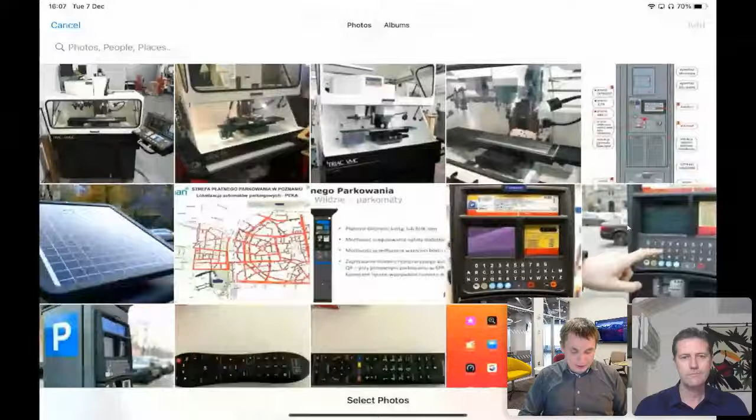Also, as you can imagine, 360 is still a valid element of virtual reality. So right now we have the ability to bring in models or assets directly from within the mobile device. Creating a full 360 lesson, selecting the objects, selecting the photos, bringing them in, uploading, and creating a lesson on the mobile device that will be some sort of demo lesson. I'm just going to use a demo category here.

So for the purpose of this webinar, giving the ability to easily launch and build everything from the level of your phone, having this available within the mobile device, adding those annotations already. Speaking about the annotations...

We all know that there is right now a new way to do the annotations. We still have the ability to move and position those annotations much more freely around the space, but we've also added far more abilities to the platform, to the lesson creation, to the 3D experience creation process. So except for the typical ones, like recording your audio, we have text-to-speech, upload directly from a mobile device, and we've also added video, PDF, and images, which allows me to easily select an image.

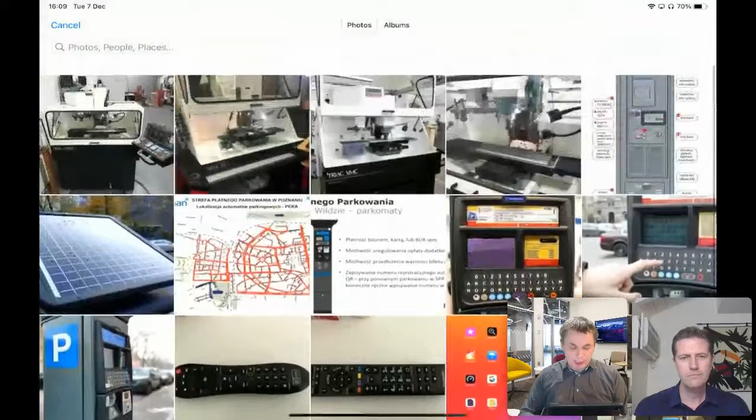If I have an image I'd like to apply here, let's say a remote control or a solar panel, I can easily add it and upload this. Of course it's best if it's in the context of the lesson, but here I'm just showcasing how easy it is to add different elements to the 360 experiences, as well as how you can build up quizzes, having that all in your 360 lesson, not forgetting about the full interactivity and immersiveness from the 360 elements.

To talk a bit more about the new options inside the platform, there is more coming, especially in the alignment of the model and bringing that in. But one thing to briefly mention: right now the icons, the models in the library where you're bringing content in, we can set them up into one-to-one scale. We can easily see if it's published or not published, if it's one-to-one scale, multiple mesh or singular mesh, which makes it much easier to choose the model you want from a library and experiment with it.

So choosing the model, here we have the ability to play this lesson, align it, and we'll play it in a moment. I don't want to put too much information, but I want to highlight that within this session, at the end, we will start not only a standard meeting, but also special meetings where we can collaborate and do things jointly together with John.

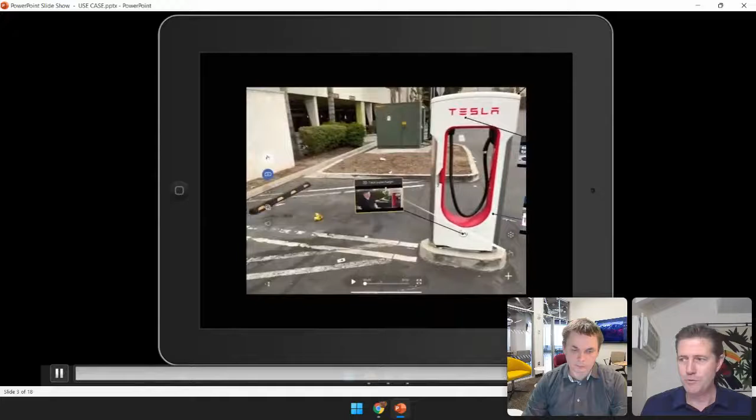And then I'll be able to play the videos. At one of our Tesla supercharger stations, charge your car very quickly and be on your way. Something that's unique about the supercharger is that it's free - not just free now, it's free forever. The number of Tesla supercharging stations is increasing dramatically.

By the end of this month... let me go back there. So I could spend some time just going through those videos.

Now I'm going to show you what we call a 3D avatar recording, where once the model is set 1-to-1, in the lower right-hand corner I can click on that plus button and record myself walking through a process and talking through a procedure. Now I'm going to play it back to you to see what that would look like.

Here you have the Tesla supercharging station. As you can see, pretty easy to use. There are many types of charging stations. This is the supercharger. As you can see, once you park next to one of these chargers, this is where you will unplug that cord and plug it right into your Tesla for a fast, quick, and easy charge.

So just a snippet of an example of a 3D avatar recording, putting into your own voice and your own words what you just learned on site. I can save it and then share that experience with other people.

Marcin, should I show the other ones or go to the live presentation? I'm going to go right now to the live presentation, and we're going to go to the others, if that's okay. Okay, that's fine.

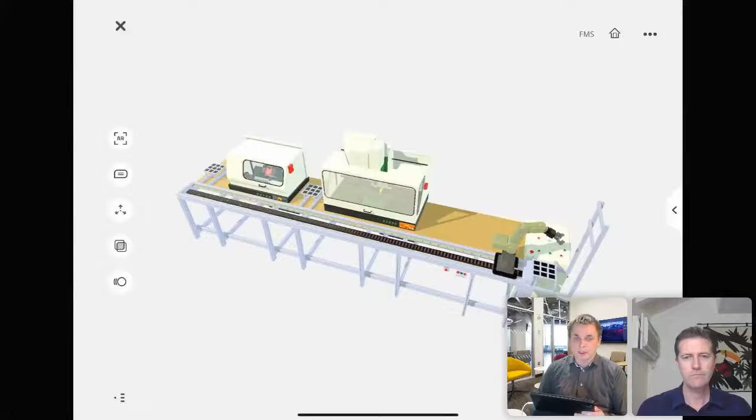We enabled the lesson edition within the AR, as was already mentioned. So the object can still have all those elements that were there before, but right now, going and switching towards augmented reality, even using my little desk here to present the object into that format.

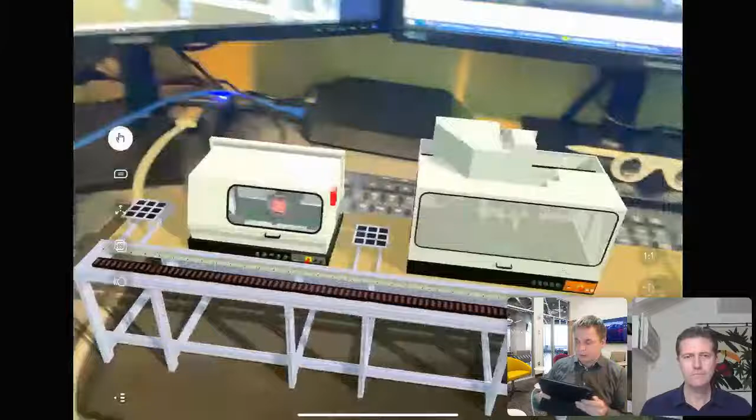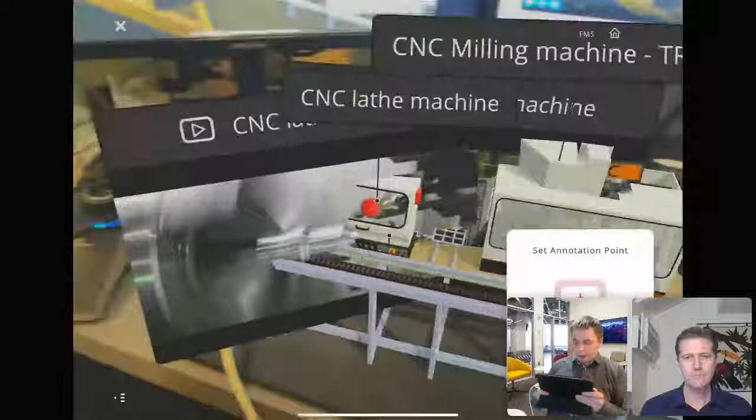I'm able to go through these activities and, in a live format, use a text annotation, providing different annotations that are already built in. I can easily grab them, locate them, and have those floating panels and annotations presented. I can hide them, I can build new ones pointing to the object, the CNC machine, having voice recognition, adding text, adding other elements into it.

Let me just take it again and do it using AI. I have the ability also to utilize this CNC machining lead machine and have it as media and utilize it.

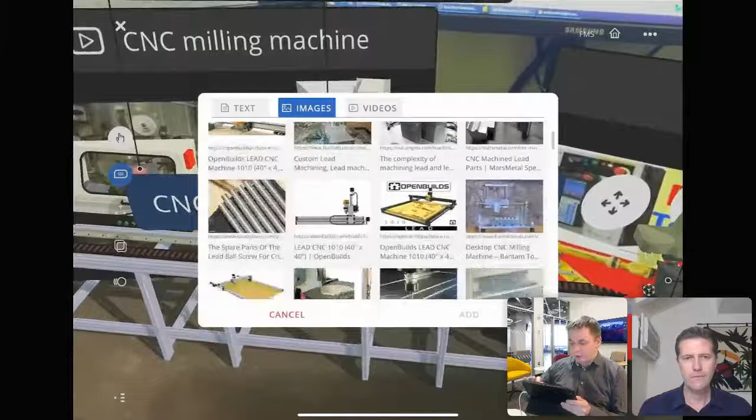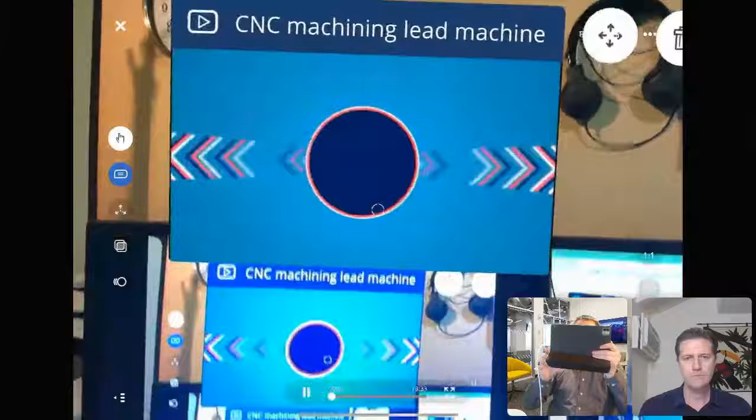So those things John was mentioning, it's actually in a live format that we can use voice recognition and find the images that suit us, making it very easy with those floating portals inside the lesson that I can freely move around, have them played, and have them being part of my experience, together with audio and others.

So that's within the AR mode. We still have this ability, which makes the whole learn, train, perform process much easier. We're going to go also towards the assess process.

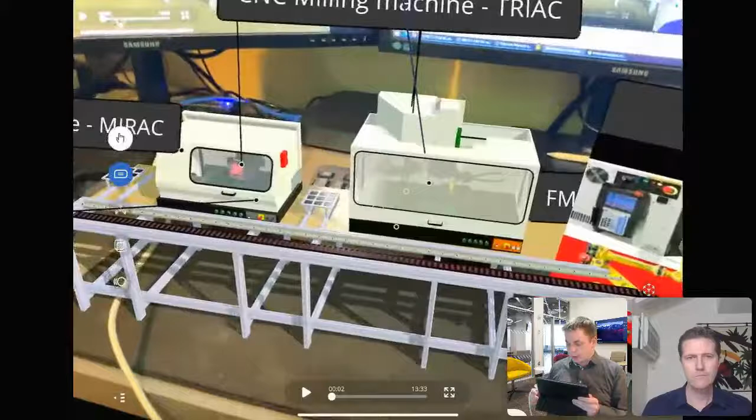As mentioned by John, the 3D recording option right now also works in the AR mode, using a 3D recording button, pressing record. Right now, everything I do, if I want to assess or present the process, for instance, I want to present the variant design where this setup is changed, and I will move the machines into different locations.

I think you lost the connection on my device. Just a second, I'm back in here.

Having the ability to move the objects, locate them, present them, while at the same time being able to interact with different elements of interactivity, using a pointer, audio recognition, audio recording, and presenting this object, all of that in the AR mode, which wasn't available before. And we have the ability even to have this 3D recording be part of the assessment process.

As you can see, there was an upload option, so lessons are updated on the go, very easy to add the lesson element. We also have the ability to rearrange the lesson elements when we're creating, building, and making this fully annotated model within EON-XR.

So those are some of the things. We also have the ability right now to present the model in a 1-to-1 scale. Let me just put the AR mode in here again.

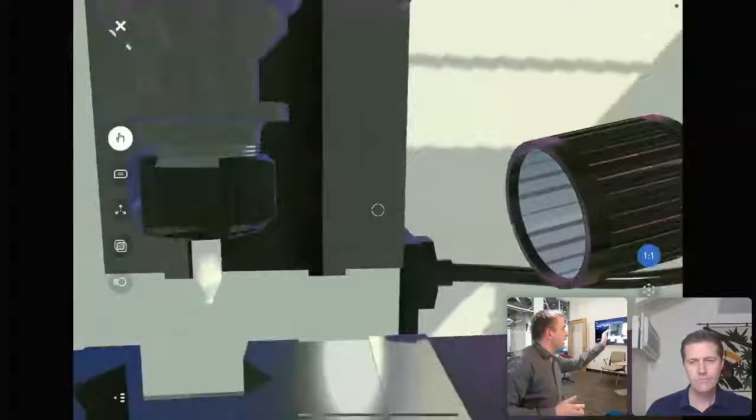Being able to bring that inside, check it, look into it from a different perspective, play, and have the ability to have all of those knowledge elements presented in my little office here, having it presented like I would be in the classroom or in the laboratory, and we will do some lab lessons together with John in a collaborative format.

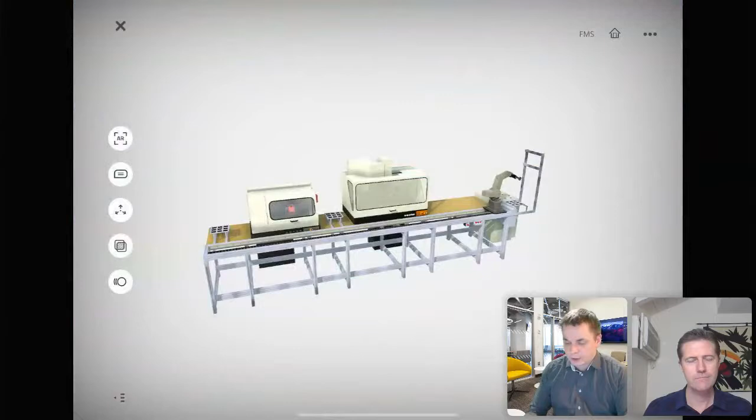So this is just to present how easy it is to create, and having the ability to play those lessons. It's also easy, as you can see, having in AR mode the ability to present the objects, start the alignment, hide the model. One more important function here, which you can see currently within the development process...

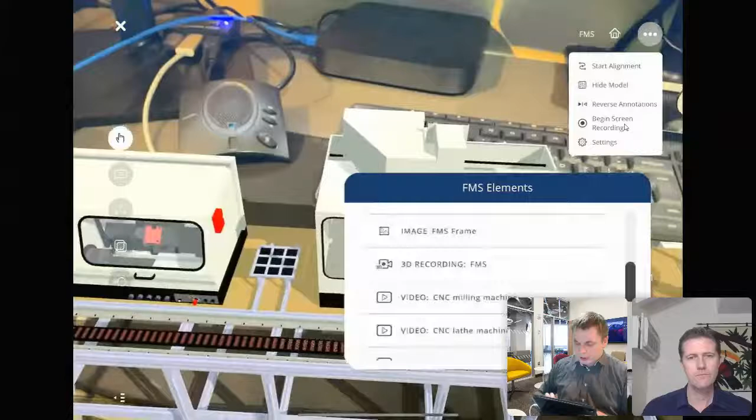We also understand how important it is to be able to capture what we do, not only as 3D recordings, videos, audio elements, images, etc., that we can present on the screen, but also the ability to record your screen and later share it within your social media, within your LMS systems, as a pre-recorded format showing how you interact with the object and explore these models, sharing them easily by pressing a recording and doing that straight away, recording from the microphone.

So using the functionality of the device, I hope it will allow me to do that. When you're done, you can always share these elements and publish them to YouTube or other media if you want. So that's some of the new functionalities right now in full use within this platform.

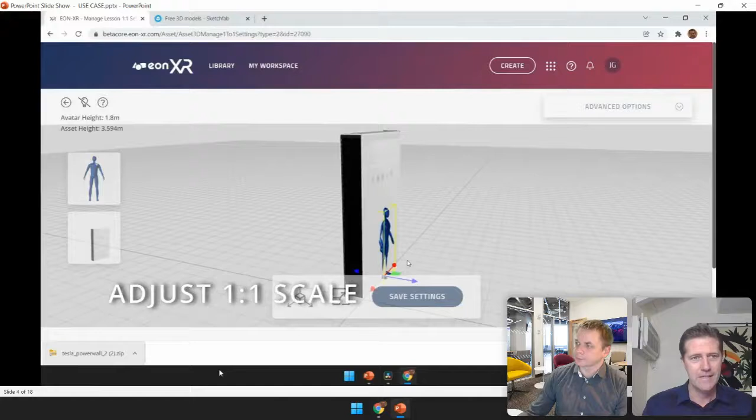And also here, I'm going to name that and set the scale. So this is the option where you can set the point of view, the reference of that avatar, so the avatar stays at the same height. I'm able to reposition that avatar in a different location.

How far away do I want to be from that model? How big is that model in relation to the person? So I can resize that, click on that person, slide this over, and place that in front of me. I'm able to click on the object, come over there, and you can see that little bar will set the height of that model, so I can set the reference, exactly where I want to be positioned.

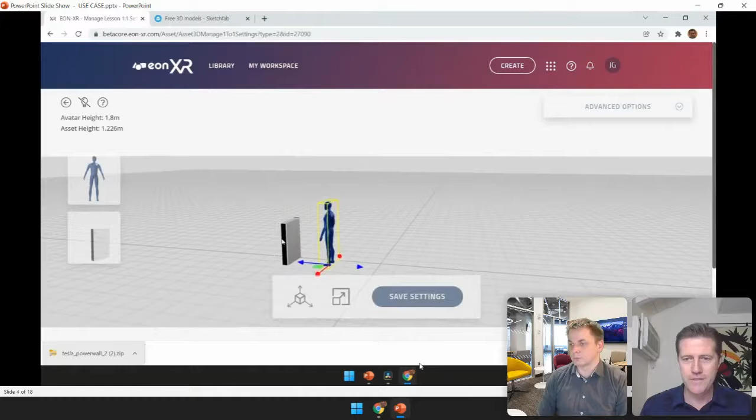Once I hit save, that will be saved for everyone. As we're going to see shortly, we can set up spatial meetings. They need to be in that 1-to-1 scale for everyone to experience that same environment. So here I've set the scale, and I'm placing my model in AR mode.

And I can move it around, have all those interactive tools that come into play. Once again, I'm using this EON-XR tool where I can do additional research. I'm using the AI search function, taking a snapshot of that object, and allows me to visually see matches. I can continue investigating and researching the specific topic.

And this will lead me to keywords, which will eventually lead me to that media panel, which I can start researching more. There's my keyword. And I can select multiple keywords as well. And then it automatically pops up all the media content, the text, the images, videos that we can add to my lesson content. And once I add that there, get that ready and play some content here.

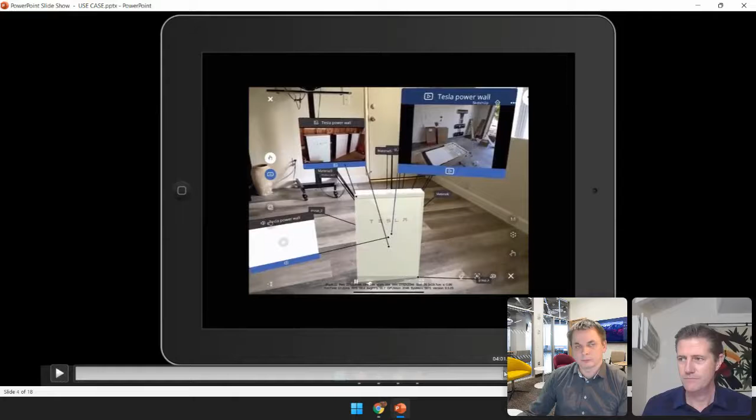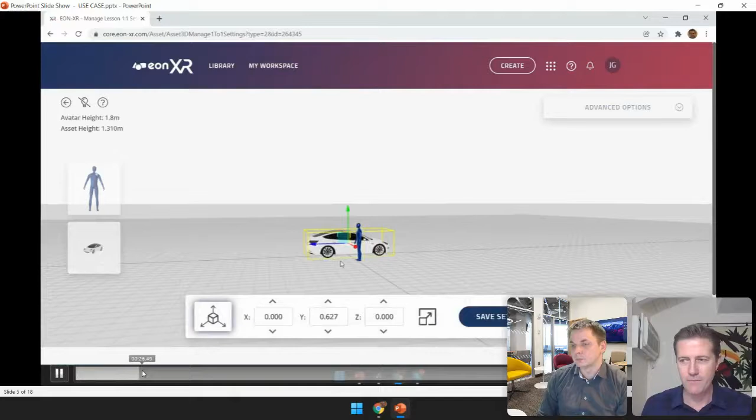Here's another situation. I can bring in another car, bringing it into my environment. What this really does is bring into context the models that we're working with. I can contextualize it, bring it into my environment. In distance education settings, I can still connect myself to these objects or spaces, and explore different objects. You can see I can walk right through that model as well.

What does it look like on the inside? What's on the outside? Okay, here we have that 3D avatar recording, which explains it's an electric mid-size 4-door car developed for 358 miles. As we walk, I can go even inside of that model and talk about the interior.

I can go right to the AI search, take a snapshot of what I'm looking at, the interior of this model, and see the visual matches that come up with that type of search. Again, this leads me to keywords, which then I'll be able to play media content in this section.

A lot of stuff, very minimal, very cool looking. I do like a 3-spoke wheel like this. I think it's sporty. So just the learning that can take place.

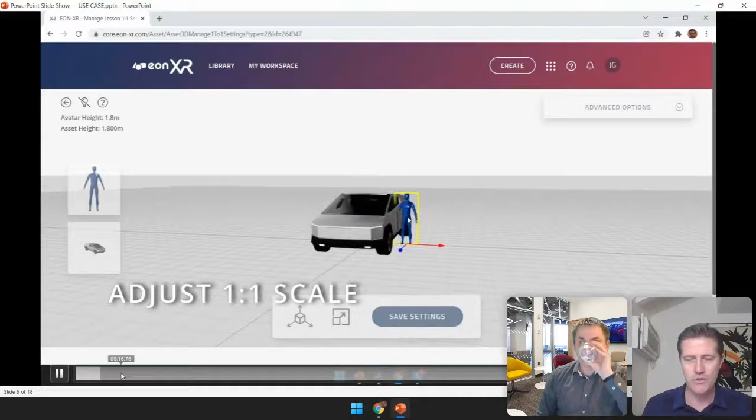And then lastly here, another example, the adjustable 1-to-1 scale. Again, I can place myself outside. Now, if it's an environment, I can place myself inside of the environment if that's what I want, for the point of view to show up. And I can easily switch.

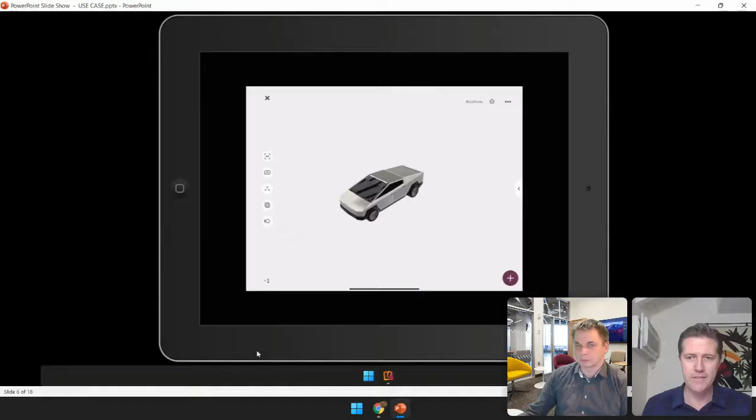Just using that little bar, I can make it bigger or smaller. You can see how the number adjusts in terms of the height in meters. It's saved, and then it's set. And as Marcin showed you earlier, that 1-to-1 circle will show up on the lesson, and that is your indicator that this is a 1-to-1 lesson.

And here I have the Cybertruck nicely placed into my living room. A little tight, but you can see I can start learning and looking at this Tesla content. Cybertruck: its release date, features, range, specs, accessories, and more. The Cybertruck is built with an exterior shell for ultimate durability. So there they continue to do the avatar recording as well.

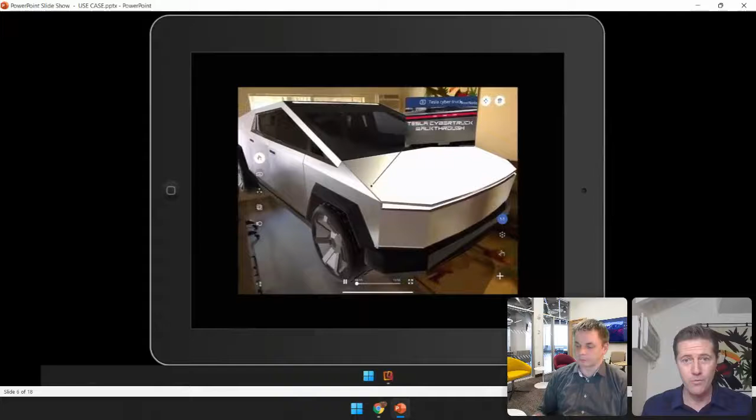Tesla is developing the Cybertruck. The stated goal: a sustainable energy substitute for fossil fuel power. And then the AI search, where I can take a snapshot of that, and it brings back the visual matches of what we're looking at. Again, with text, images, audio, and it makes it nice where I can rearrange if I walk around that, I can grab that video and place it neatly in different positions and locations.

So those are the examples I wanted to show you, and how you can use either a scanned environment, scanned object, or a computer-generated environment, setting that 1-to-1 scale.

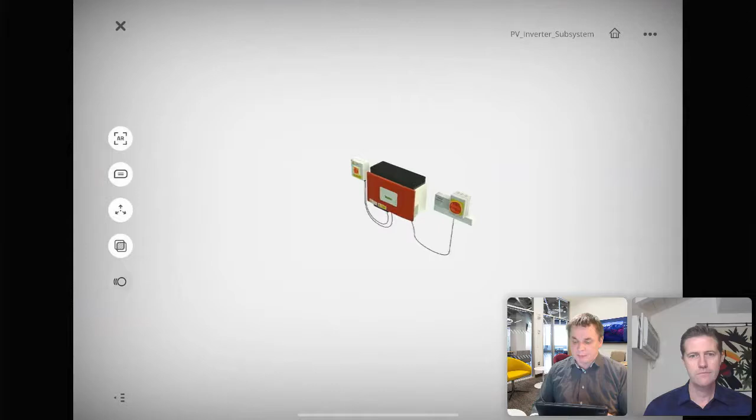Within the lesson process, when starting a lesson, I'll stay on the same renewable energy topic. Here's an element based on solar energy and how it's converted, an in-house installation of the inverter. I can place it on my desk as augmented reality, as before.

I have the ability to explore it in augmented reality. But at the same time, having this model, I have an ability here on the top to do the alignment. I'll show later how to do the scanning, but right now I'll align at this point on the model.

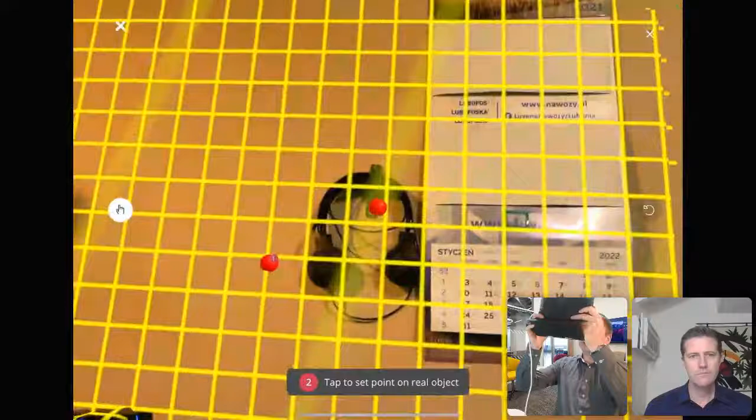I can align this point, and you can see in real time my environment is being scanned, and I'm putting it onto my wall. I select another point of reference on the 3D model and point it to another location on the wall. Then I can choose a third point and map it there. If mapped correctly based on that information, it will fit based on that format.

If I do it wrong, I can always place the object, select it, and redo the process easily. Just start the alignment, select the first point with real-time scanning, put the first point here, second point somewhere else, third point in another location—three points alignment, easily mapping and fitting into the wall. We can always hide elements, have annotations if they exist, and all the knowledge attached. It's a little detached on my screen because I pointed to the wrong points, but it's an easy process.

Now I'll show how easy it is to build that using 3D scanning technology, like the things shown before. Our recommendation as EON is that you use an existing scan. You can use the library, as John mentioned, using Sketchfab or other libraries. There are plenty of them.

There are applications already existing, like Scaniverse, that can create this digital twin in a matter of seconds. If you have an iOS device, or the latest Samsung device, they have much more support for 3D scanning. We can scan the object, and you can see how easy it is to scan from different points of view, creating a digital representation of the real world. In this case it's not a very attractive desk, but what I want to show is...

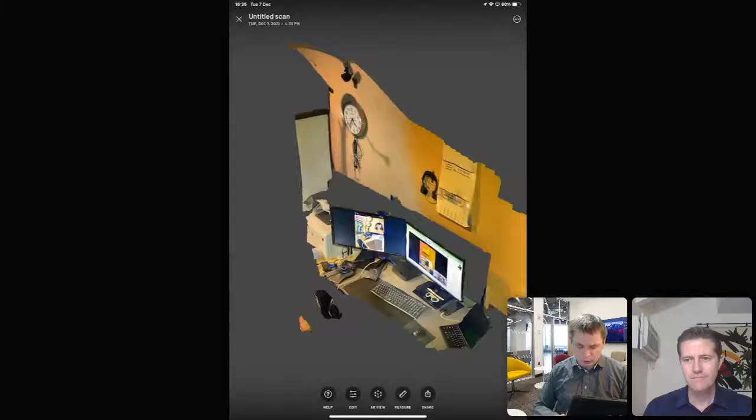...if you're in the laboratory and want to create and bring models easily, even edit those models, we can use third-party solutions. What EON does best is not reinvent the wheel, but integrate what exists and create immersive experiences based on existing solutions—saving it, sharing this model from within the application in a matter of seconds into EON XR, uploading to the library, and making it available using the GLB format.

So it's not just what we're showing, it's really an easy process to bring these models, align them, and illuminate your reality, building this digital twin and utilizing all the other functions we showed you before.

As I showed, it's very easy to set up the thumbnail for the model, just a few seconds. Take a snapshot, update that thumbnail, and build that as an effective element of your VR/XR experience, creating the lesson, setting up the category, and everything else as we showed before. It's possible to be done.

One more thing to mention is that within those models, the next level in the creation process, the next level into the building, is the ability to build those assessments, the ability to assess. So far we had the ability to build a quiz question.

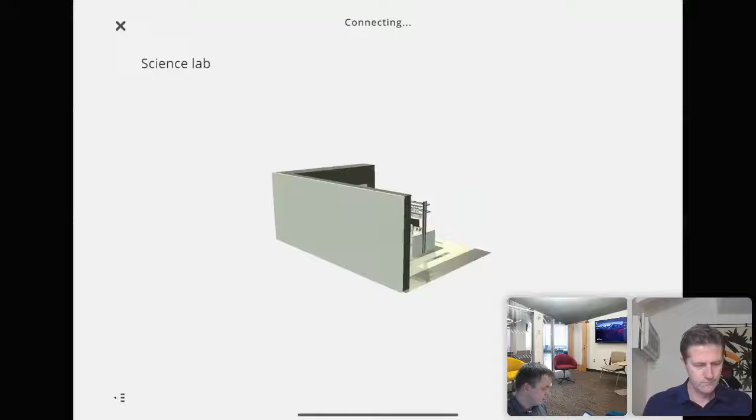356-919-713, as you can see on the screen. Okay, so I will do this spatial meeting. Once again, what we have right now at this very moment, we have a limited amount of the avatars, but we're building up this ability to bring more of those avatars into this, and we can present the object and having this laboratory here.

How's it going for you, John? Logging in here. It's telling me it's on the Innovation Academy, but no, it isn't. Yep, I see 356. Maybe we have to double check it. Don't worry on that.

And so maybe we will start the parking meter in this case, and we will try it. So I'm going to use this parking meter element in here, also to showcase it. And in this case, John, just for your information, I'm going to use the daily. Let's do that.

Some of the things we prepare in advance, I want to be sure. So in XR library, going into the object, being able to start the meeting. Once again, this time the details, John, maybe third time is the charm. 584-500-990. You can see it on the screen.

You can see that. I'm going to start the meeting. Starting it here. Loading the avatar. And placing the objects in a 1-to-1 scale, which actually came from a 3D scanning.

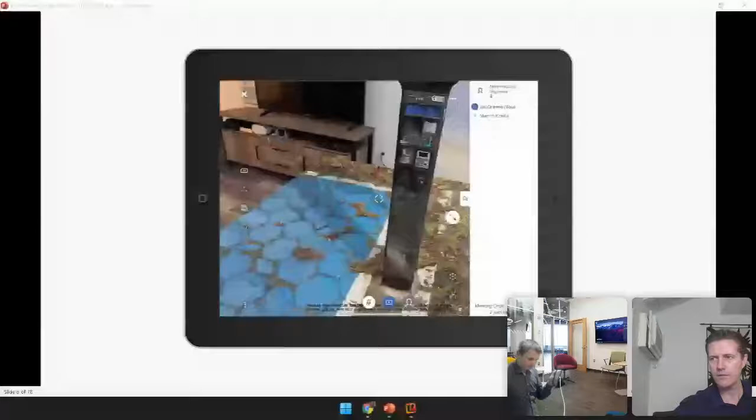Yeah, let me try presenting on my screen. Yes, please go ahead, because maybe there is some problem with my cable connection here. There we go. Oh, brilliant.

Yeah, so we're in this environment. So I see Marcin, and I'm currently presenting. So as the presenter, in the upper right-hand corner, I have these tools. I have this little laser that I can work with. I have a little hand that I can grab different objects with. So I'll let you take the control, Marcin.

Yeah, and I can see you walk around the space. I'm going to let go of the control. So right now I can kind of go around. As you can see, I'm also able to look around, go around the objects. Sorry that the image from the webcam will not be the best from my side, but being able to kind of go around the object. There you are.

I can present, discuss, and showcase the elements on the object as well as annotations to you. I have the ability to point, discuss, and present it. Right now it doesn't display the way I'd prefer due to the cable connection, but it's working - being able to be in this space while still seeing you, and I'm pointing right now looking into your face.

If I put my face down or up with my elements, I can almost virtually shake hands and collaborate. At the same time, having audio connectivity, being able to see the object in photorealistic elements, making the object disappear and become semi-transparent, as you can see. And if there are annotations or quizzes inside it, I'm able to do that within the process.